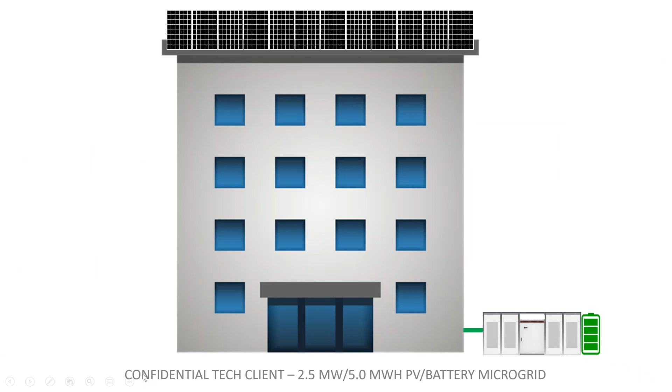More recently, I've been working with a tech client that's putting in a really large PV and battery microgrid, so they can both do demand charge shaving. They can look at how much carbon's on the grid and reduce their carbon emissions, and disconnect from the grid if the grid goes down.

The other really interesting thing, and this is where a lot of the presentation is focused, is we realized there's quite a bit of carbon involved in the materials in the building and in building buildings. This graph shows the yellow as the carbon to build the building. If you build a building in 2020, there's a certain amount of carbon in the materials and physically building it. Then once it's in use, the operation releases carbon. For the average building, it takes something like 12 or 13 years for the carbon from energy use to match the carbon embodied in the building just by building it. The first time I heard about this was actually with our building back in 2005.

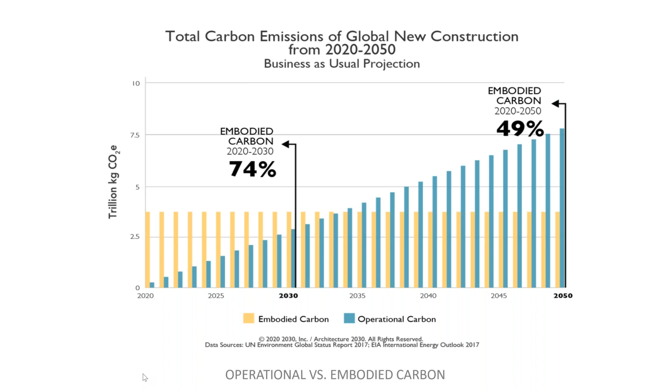The structural engineer, David Mar, was explaining that they're going to put fly ash in the concrete, which reduced the amount of cement and saved carbon because of something called pozzolans in the concrete.

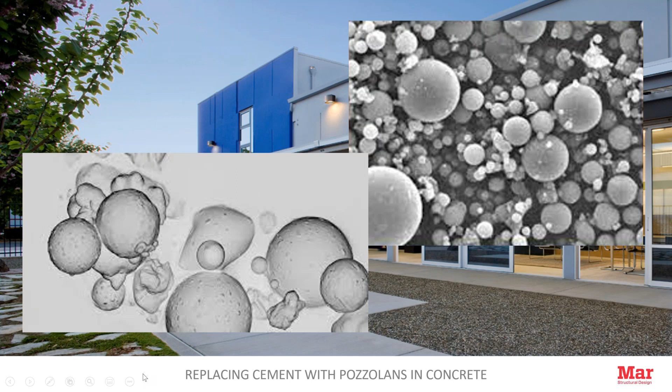In 2008, an architect named Larry Strain did this in-depth study. I had never seen anything like this before, where he was looking at the carbon in all the materials in the building, and even the carbon from workers driving to the site and things like that.

For this particular project, it was mostly wood construction, so a lot of the concrete ended up being in the slabs, the floor slabs of the buildings.

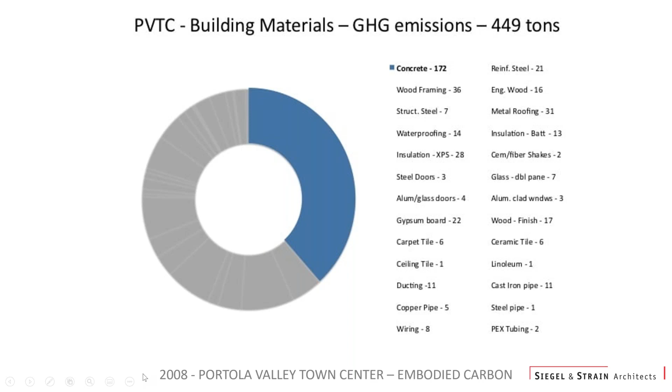So if it's concrete, you could look at things like fly ash or reducing the amount of cement in the concrete. If you're using steel, recycling is a key way to reduce carbon. And then, of course, if you could use renewable materials.

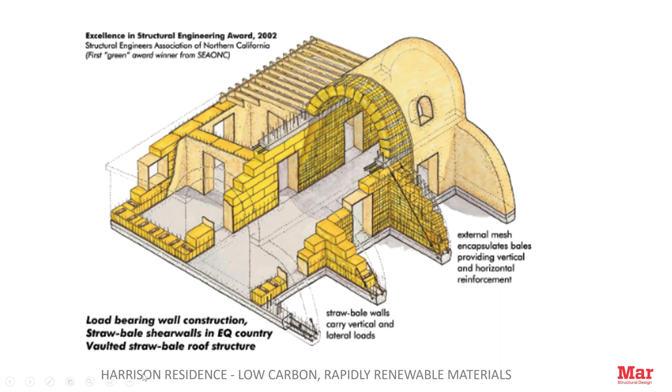This is the same structural engineer, David Mar, who did this crazy straw bale building that even had straw bale as part of the structure.

Most recently, we're just opening a project in Silicon Valley that is, my understanding, the largest mass timber project in the country right now. So using wood as the structure can reduce the carbon in buildings.

Hi everyone, my name is Webley and I am a project manager at New Buildings Institute. I am an architect with 18 years of experience in the sustainable design and construction industry. At NBI, I focus on promoting net zero building research through codes and policy development and market outreach. Recently, I've been conducting research on incorporating embodied carbon into the building code. I'm going to walk you through some of that today, as soon as I figure out how to use the controls here. There we go.

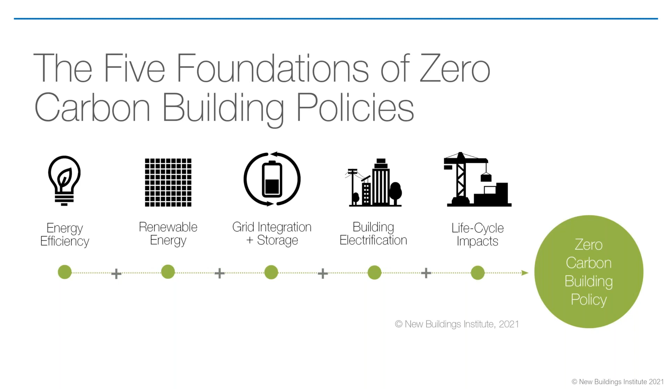Connie kind of introduced us a little bit to NBI, so I won't share too much except our 5 foundations. Together, these five foundations will help get us to a carbon neutral future. Each foundation has a really defined scope and a goal that will help us meet our 1.5 climate solutions. I'll be presenting focused on that last requirement, last but not least, the life cycle impacts component.

As David discussed, our building codes have become more efficient. We've reduced our operational carbon. We still have more to go, but we're getting there. And the embodied carbon emissions has become a larger piece of that whole carbon pie on a building. So more people in the design and construction and even the product manufacturing industry are seeing that embodied carbon really needs to be addressed.

And we've also seen this through third-party rating systems. They've been working on this for, I feel like, over 20 years at this point. They've been encouraging the evaluation of embodied carbon, of singular material, and whole building embodied carbon for decades. So because of the efforts made by these early adopters, we're able to have the conversations that we can today, that has been able to look at codes and policies.

Voluntary programs have been considering embodied carbon for years, as I mentioned. Half of the embodied carbon rating systems, if not more, address embodied carbon in some fashion, whether it's required or whether it's optional. So from LEED to Living Building Challenge, Green Globes, BREEAM, Green Star, and more.

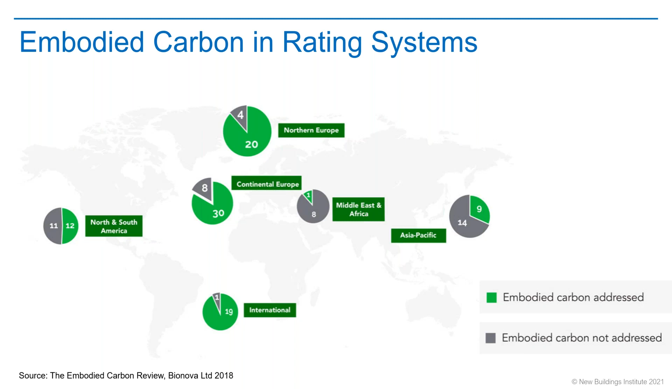And many architecture firms have been documenting their embodied carbon within their projects, whether their clients are asking for it or not. Perkins & Will is making news by voluntarily designing to net zero embodied carbon. HOK and many other design professionals have been signing on to industry commitments like the SE 2050, which is the US Structural Engineers 2050 goal, and AIA's 2030 challenge for committing to track, reduce, and report embodied carbon.

So those that are currently tracking and reporting embodied carbon are leading the way for future policy by providing us this really invaluable data.

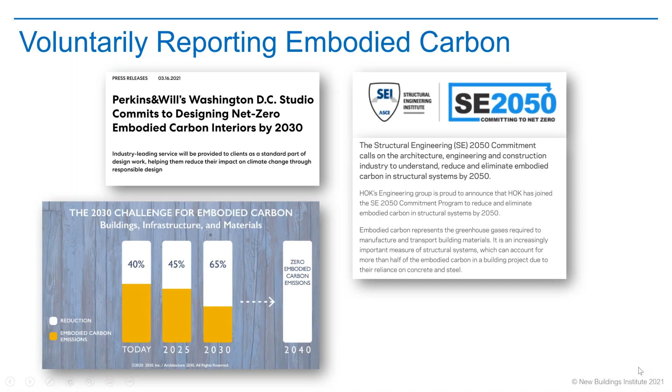So we're starting to see this traction in the market to address embodied carbon head on. Instead of kind of through voluntary actions, we are working with codes and policies to address it.

Buy Clean California is probably the most popular policy. It's been replicated in other places like Washington, Minnesota, Colorado, which was just passed, and other places. The Buy Clean model requires that jurisdictional dollars are spent on specific products like steel and insulation that meet specific low carbon requirements. There are other policies.

Portland, Oregon, where I am from, has a low carbon concrete incentive, which sets a global warming potential, or GWP, which is a term I'll be using pretty frequently. So global warming potential is a way to present carbon CO2e, so carbon dioxide equivalent.

Hawaii has a carbon dioxide mineralization concrete policy that requires that all state-funded projects that use concrete are required to include carbon capture. So that one's a little bit different.

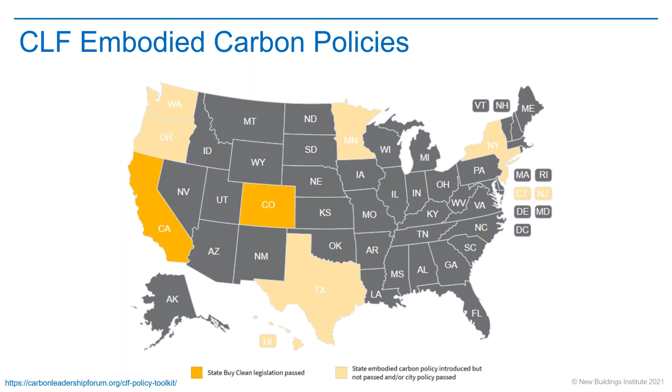As I mentioned with the Buy Clean, the public embodied carbon policies use the power of the government spending to direct their dollars towards material specifications that meet their climate goals. So it's very tailored towards a specific climate.

Where codes come in is that they really set a limit for all buildings. All buildings must comply, and it's a direct regulatory process. So this really sets rules that everyone, like no one can get out of it, essentially. We're no longer looking to just kind of nibble around the edges. We want to go full force and have all projects comply with embodied carbon requirements.

And we really believe that we need that deep change to address our 5 foundations that I mentioned. So we have established building policies. They've done a great job at addressing energy. We have more to go, but we have these policies in place.

We've got codes, we have zoning, building performance standards, jurisdictional building policies, etc. But these tools have not yet directly responded to carbon, and that's okay. We don't necessarily need new regulations. We can use our existing frameworks to address carbon, and that's what we are hoping to do.

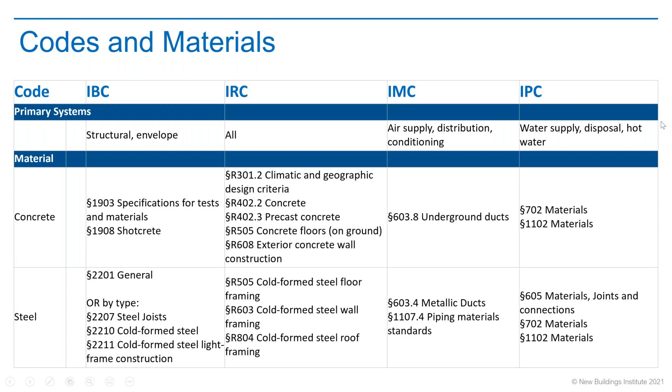So we're looking at three different opportunities to address upfront embodied carbon in codes. The first is EPD reporting—EPD meaning Environmental Product Declaration. We're suggesting that a specific percent of materials, by cost, weight, volume, or maybe even just a count, perhaps 50 materials within the project, provide EPDs. This helps prime the market for what's coming and allows us to collect important data that can inform future steps, like the materials approach.

With the materials approach, we want to set specific targets so that materials must meet specific embodied carbon requirements. We might focus on high global warming potential materials like concrete and metals at this point, or we could encourage low energy or low carbon manufacturing processes. We're already seeing this with programs like Energy Star and WaterSense.

The third component is reducing overall embodied carbon compared to a baseline, through a whole building LCA. We could look at a percent better than a specific baseline, or set a carbon limit per floor area. The limit could be based on different product phases—so upfront embodied carbon, or we could look at whole life carbon, which is everything from product manufacturing to end of life.

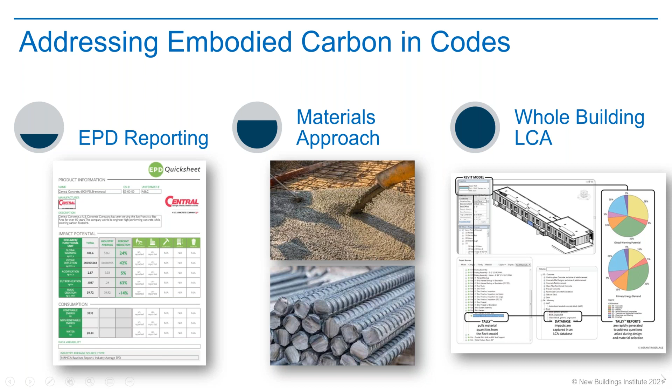When it comes to environmental product declaration reporting, it's important to know that this is just a bare minimum. EPDs are a summary of the material life cycle analysis. They quantify the impact of a product on the environment, and include information about the manufacturer, the product, the life cycle analysis, the methodology, material content, emissions, etc.

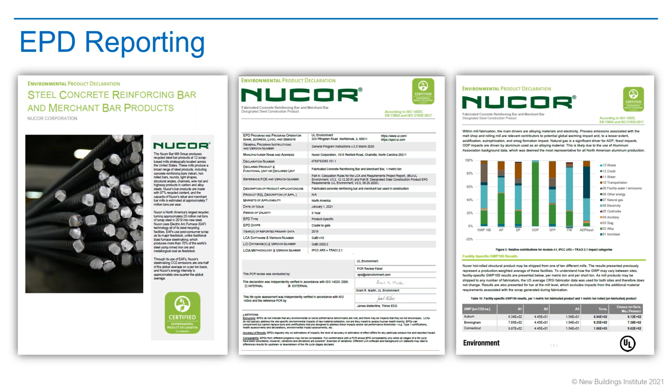But the EPD is really only data. The existence of an EPD does not mean that it meets a specific environmental standard. It might include or disclose information about a product, but it does not verify that it meets a certification like GreenGuard, for instance. It might include information like the specific recycled content.

The second approach is the materials approach. We're interested in setting specific low embodied carbon requirements for materials at this point, and we really need the data to do that. That's why we're encouraging the collection of EPDs—to have that data for materials, to be able to look at it and set national trends.

In this example, it's an analysis of thousands of concrete EPDs from different regions in the US. We evaluated the data to see if we could set concrete global warming potential limits based on different regions in the US, or if we had the data to set that nationwide. So in this case, we're looking at 4,000 PSI concrete, a specific strength of concrete, to see what percentile to set that global warming potential limit.

If we set that GWP too high, it won't do too much to reduce embodied carbon in concrete. But if we set it too low, manufacturers won't be able to comply, and then we're dealing with variability based on regional materials. So global warming potential might not be the right data point for every product.

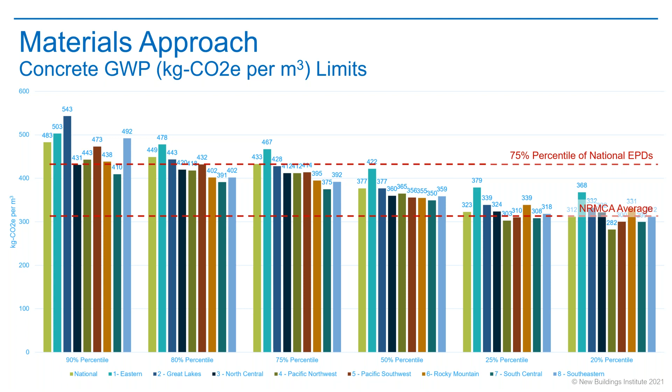As I mentioned, we're also looking to include specific material manufacturing processes that reduce embodied carbon in manufacturing. For instance, Energy Star certifies cement, concrete, steel, and even cracker plants by evaluating their metrics. That might be an appropriate way to look at code, similar to what we do with WaterSense and Energy Star for appliances.

The third option is to look at whole building lifecycle analysis—whole building LCA, as I'll use that term frequently. When we look at energy modeling, we're past looking at the energy savings of a potential window—we're looking at the energy efficiency of an envelope or the entire building, and we have baselines for that within energy modeling. We can do the same thing when it comes to whole building embodied carbon.

We can simply require that an LCA be done on a building, or we could set specific limits per building system or for the full building. As I mentioned with the Vancouver, BC rezoning requirement, this is similar—they're currently just requiring that an LCA be done, and we assume that in the future they'll set requirements for what that baseline must meet.

The LCA offers a way to look at embodied carbon for a whole building. We'll see some examples of this in the future. But one of the largest benefits of the whole building LCA is the consideration of building reuse.

Where the first two options I looked at really look at new materials, the whole building LCA encourages reuse and has some historic and equity considerations, but there's also some negativity associated with that, which we won't get into today. When it comes to reusing buildings, we're always concerned about asbestos and lead and other hazardous materials in those buildings.

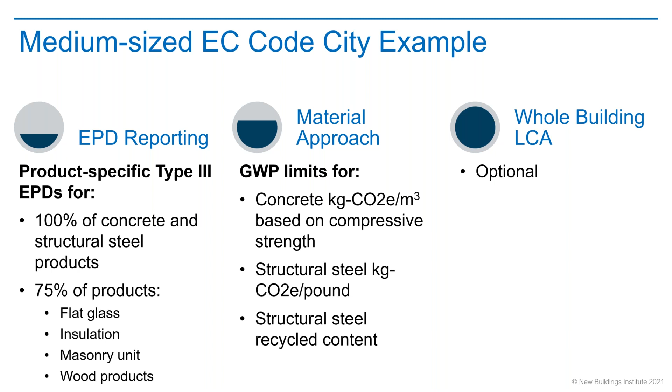I should also mention that as I present this information on concrete, that this isn't the first time that concrete has been regulated in code. Marin County in the Bay Area was actually the first to set concrete global warming potential limits. Our intent with this approach was to provide different options. In Marin County, it is really based on global warming potential of concrete and cement. And here we're looking at a couple of other options.

So we know that there's over 100 Energy Star cement and concrete facilities that are reducing their plants' energy consumption. If we can encourage the use of those certified facilities, that could be a good compliance path. And since EPDs don't account for offsite renewable energy, we're evaluating if a product manufacturer could require renewable energy certificates to show that they are using a lower energy source.

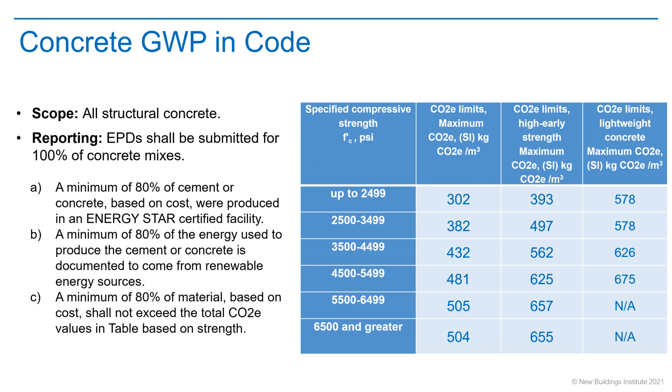So just want to still reiterate that we are exploring these options. I absolutely welcome input, feel free to email me. We're currently questioning if the recycled content will make the progress necessary to move the market, because it seems like the market is already there, but it also has a benefit of prioritizing US made steel. So that's a benefit in the US in some capacity.

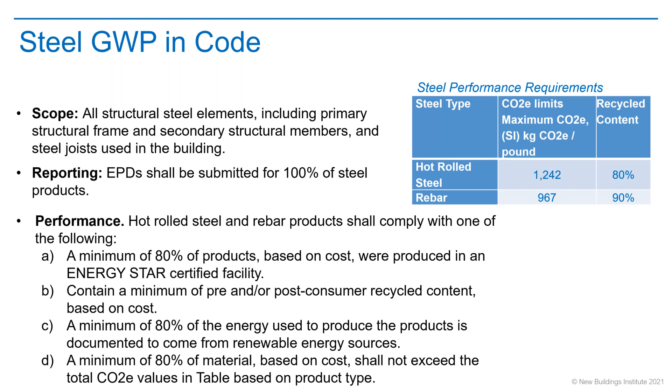And we know that EPDs are a great industry standard, but they really aren't perfect. So how can we work with that standard, but also look at other options where the EPD is not addressing some of the environmental aspects that we'd want to see for reducing embodied carbon. And ideally, all large projects would actually conduct a whole building LCA, and we'd have consistent terminologies and baselines that would be used around the globe, but we're really not there yet. We're working with others, and we see how a low embodied carbon future is possible, but it's going to take all of us working together on it.

So as I mentioned, we're still exploring these options. I welcome your comments, feel free to email me or ask questions at the end of this. Thanks.

Thank you. This is Roland Hunziker. I greet you from Geneva, Switzerland. I'm with the World Business Council for Sustainable Development, Director for Built Environment.

Webly, you could not have given a better handover than your last words in terms of whole life carbon assessment, and that's exactly what Chris Carroll from Arup and I will focus on in the next 15 minutes. WBCSD is a global member-led business organization with about 200 global companies from 23 different sectors, global coverage, and my focus is particularly on the decarbonization of the built environment.

I think we all know these numbers, but it's still important to put them in front of ourselves. The built environment makes up 40% of global energy-related emissions, and I think it's a number that is still not sufficiently digested by all stakeholders. This is a massive sector and needs a really coordinated and collective response, as Webly has mentioned. And we see the importance of embodied carbon obviously going up.

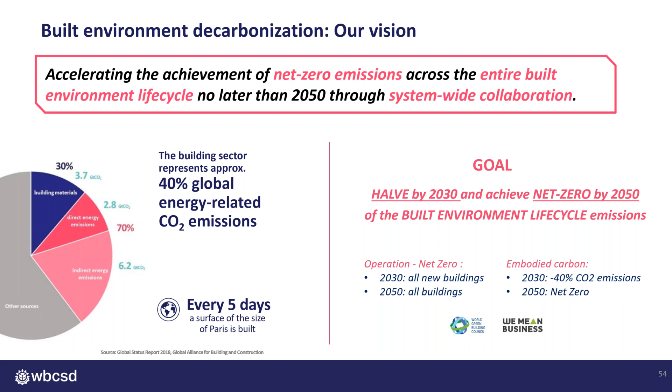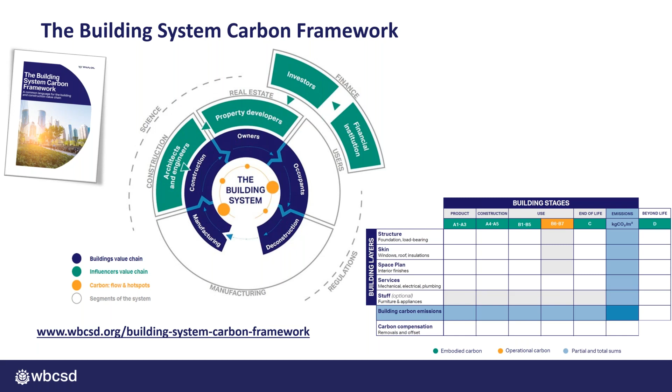So what this framework helps us do is involve all actors with influence, address all the emissions across the whole life cycle from embodied, and also including energy, and including the embodied carbon during refurbishment, which again I think Chris will highlight plays a significant role along the life cycle, really helping us take on a performance-based approach that reduces these life cycle emissions.

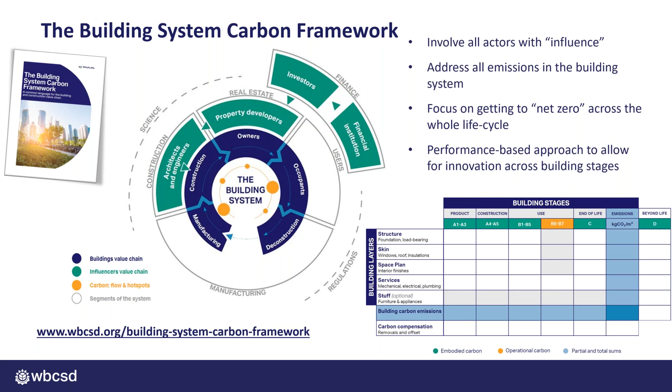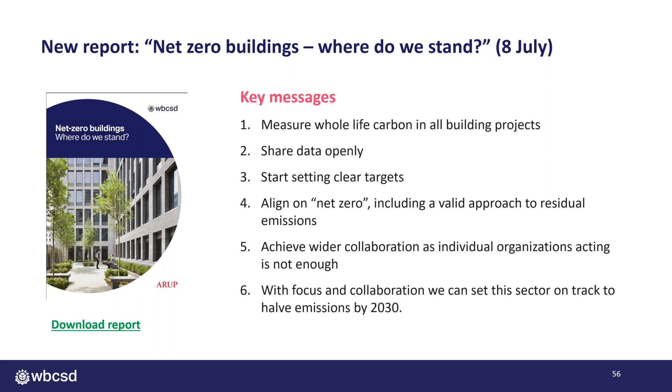This is what we published two weeks ago, and this is what will be covered in much more detail in Chris's presentation. It's about the importance of getting the data, showing the data openly, and setting clear targets. These are some of our main messages from this work, and we're also daring a challenge: we believe that with focus and collaboration, building projects today could probably already halve that upfront emissions footprint, or at the latest by 2030.

We issued another study that is quite related, but focuses on the investor and developer community - how those organizations that invest or develop projects can set requirements along different stages of a project lifecycle. It's a practical report. We've been supported on this by One-Click LCA based on their very large database, and also by leading examples from the Nordic countries in Europe that are starting to set embodied carbon benchmarks.

This study looks at how investors, developers, but also tenants can set requirements in the earliest stages of their projects. We believe that with this, we can help send an additional signal to all stakeholders in the value chain and really work together to achieve those performances that are set from the outset.

Just a look ahead - we're gearing up slowly but surely to COP26, and we'll be part of a group of global organizations helping to develop a built environment day. We really want to highlight the importance of one voice and one ambition that we are able to reduce emissions, and how the different organizations part of the race to zero can really make a difference by reporting, measuring, setting targets, and pursuing the radical collaboration needed across the full value chain.

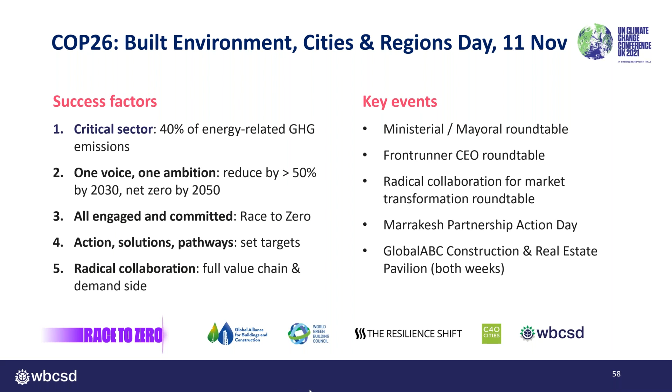So with that, I just wanted to introduce the context of the work we are doing, and now I'm handing over to Chris, who will walk us through the case studies in more detail.

Given the existential climate crisis we face, Arup have recently made a global commitment to put genuine sustainability at the heart of everything we do, and hence the statement, sustainable development is everything. I'm a director of Arup's building engineering group in London and Arup's UK net zero buildings leader.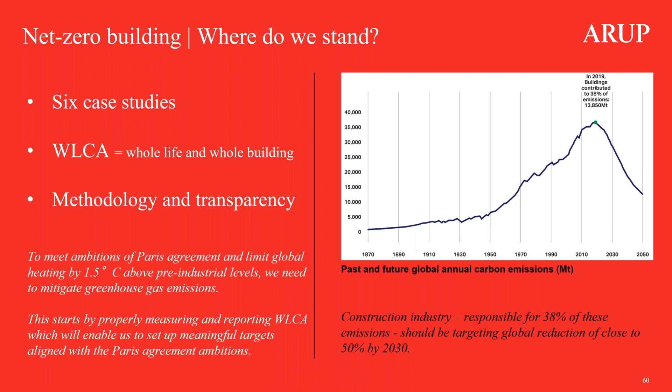A key asset we bring to our relationship and membership of the WBCSD is our projects and the projects that we deliver, and hence we committed to the idea in our first year of producing some in-depth whole life carbon footprint case studies based around our projects. We thought this would be relatively straightforward as a kind of introduction to the WBCSD, and we thought 6 consistent whole life carbon assessment projects would be a relatively straightforward thing to do, but it proved a lot more challenging than we expected. I think this already tells us something important, and we'll come on to more on that later.

I'll go into a little detail in a minute, but we ask that you please download the report and go through it yourselves. There's a lot of data, a lot of information in the report, and we won't be able to cover it in any way here in this session, but please read it at your leisure.

There's actually very little published information on whole life carbon assessment, maybe with this clarity at present. One of the things we're pointing out is this needs to change rapidly. So we think this report is important because it's based on real, transparent data that's presented in a way where you can see exactly where the carbon sits across the whole life cycle of a project.

As Roland put on the screen earlier, we believe it draws out some very clear key messages - messages that reiterate what Webley was saying earlier, that we have to move rapidly to whole life carbon assessment of everything, all our projects at all stages. We have to develop and share carbon intensity data openly, so the EPDs etc. that Webley was talking about. We have to develop and set clear global targets, and we have to much more precisely define what net zero buildings actually mean, and that you can't simply buy offset to claim net zero. These buildings that are claiming to be net zero have to genuinely be reducing global greenhouse emissions, and we have to achieve wider collaboration across the whole industry.

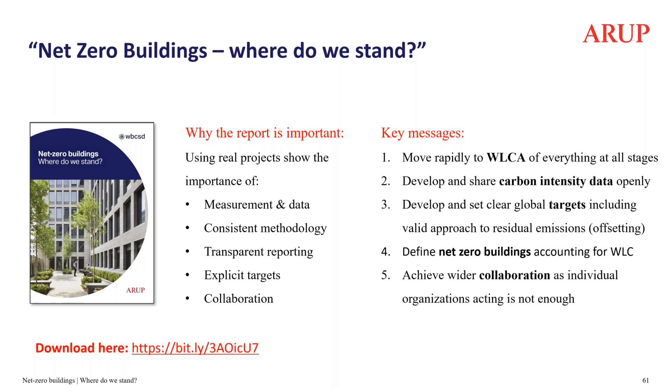This is the structure of the report. There's an introductory section, the 6 case studies are summarised, there's a results and discussion section where we talk across all of the results. We talk about the role of offsetting, we talk about some of the challenges, opportunities, and we draw out some conclusions. We hope that as you read the report, you would sympathise with the conclusions and draw similar conclusions yourself. Then as an appendix, we go into more detail in terms of the case studies and really put all the kind of assumptions and data that we've used, so that can be used by others to maybe even compare and contrast projects that you have sight of.

Methodology does matter, and we wanted to be consistent across our 6 case studies, but we think also the industry as a whole needs to be consistent in how it presents and shares data in relation to the carbon footprint of the projects that we develop. With our work, we also wanted to support trialling the WBCSD framework for reporting whole life carbon assessment, and we wanted to be part of developing a more common and clear methodology, promoting more sharing and development of good benchmarks and targets, and with all of that you can start to establish really good targets.

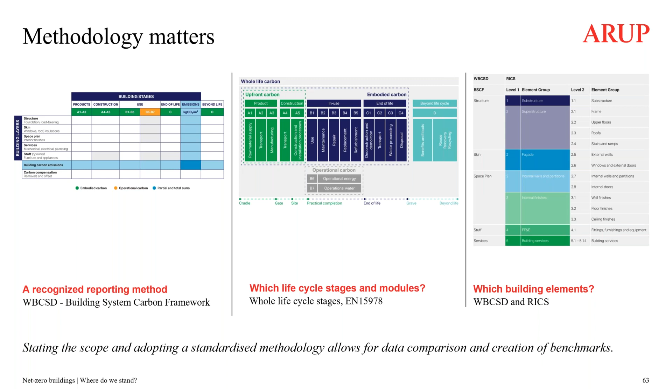In a similar vein, the assumptions that are made are also important, and it's important that we share this information transparently. The data available at the moment, both in terms of embodied carbon intensity factors and operational grid intensity decarbonisation, is very patchy and quite limited, and we can't keep this as a barrier to reporting whole life carbon on our projects. So in parallel with pushing for better data, we have to share and make best assumptions now until we fill the gaps. And that's what we've done here. You'll see through these case studies that in some cases where we haven't precisely known data, we've used benchmarks, or our best understanding as it stands.

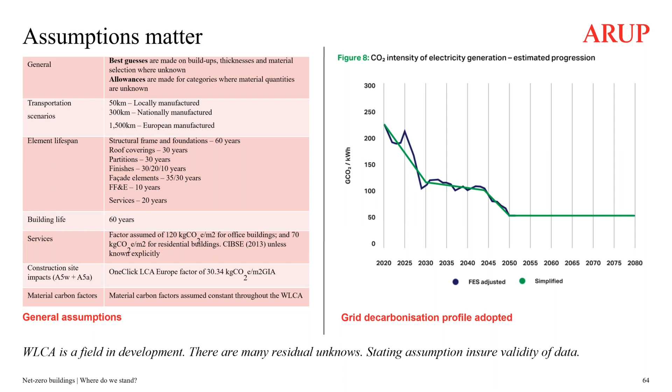We've also taken a look within the report at benchmarks and where targets might sit in relation to those benchmarks. There's a necessity to establish where we are currently, and then if we're going to reduce 50%, what we're reducing 50% from. Here in the UK, there's been a reasonable amount of work around establishing benchmarks, both in terms of embodied carbon and setting targets against that, and also in terms of energy use intensity and setting targets against that.

As Roland said, the key premise to all of this is setting up the framework for us to reduce everything, ideally, by half now, so to focus on really deep systematic reductions.

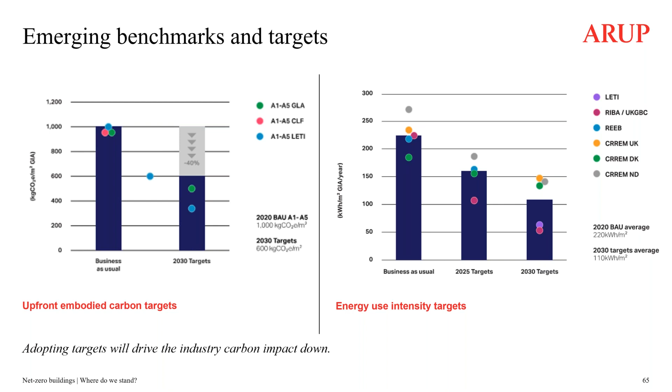Hold on a second, I'm just going to stop somebody hoovering. Sorry, next slide, please.

So the case studies, we recognise, are only 6, so they're limited, and they're all Northern European projects. But that wasn't through a lack of trying to get US, East Asian projects, or projects from other parts of the world. It's just that we couldn't get the data from these places. These places seem to be less advanced maybe than some of the countries in Europe in terms of whole life carbon assessment. Hopefully a situation that's going to change rapidly.

For instance, in London now, it's just become mandatory, pointing to what Webley was talking about. It's become mandatory over the last year in London to report WLCA, whole life carbon assessment, as part of the planning process. So you have to submit it with all new projects.

However, within the projects, we'd hope you'd recognise them as typical projects that you're working on, where the componentry and the types of systems are very similar to the stuff you're working on. But we would make it clear that all the projects had some kind of focus on sustainability.

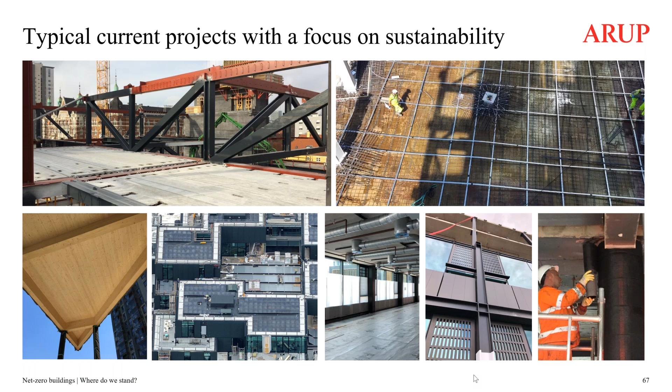Next project, next slide, sorry. Sorry, Connie, thanks. So this is one of... sorry, can you go back? Yeah, this is one of the case studies

So there's a description of each of the 6. Next slide.

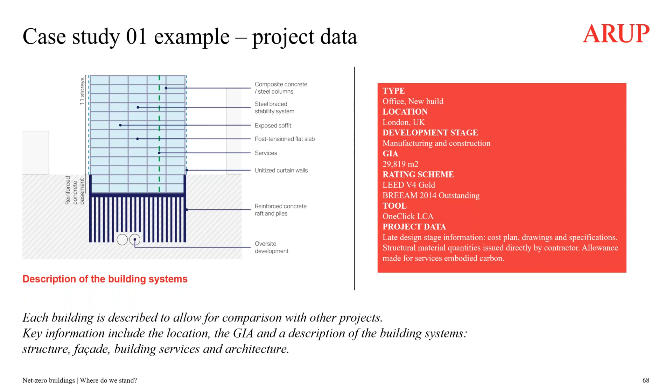We are clear in our description, the information we provide, what the assumptions are, and what data we've used in building up these whole life carbon assessments, in terms of the carbon intensity of the concrete used, type of concrete, how much cement replacement, type of facade or finishes, raised floors, heating systems, etc. Also the energy use intensity, and we've pointed to what we know about the grid intensities and decarbonisation of the energy systems in the various geographies we've looked at.

We've used One Click software to pull the data together, primarily because it's one of the only few certified LCA calculators we can use in the UK as part of the projects we have to submit from a mandatory perspective. Next slide.

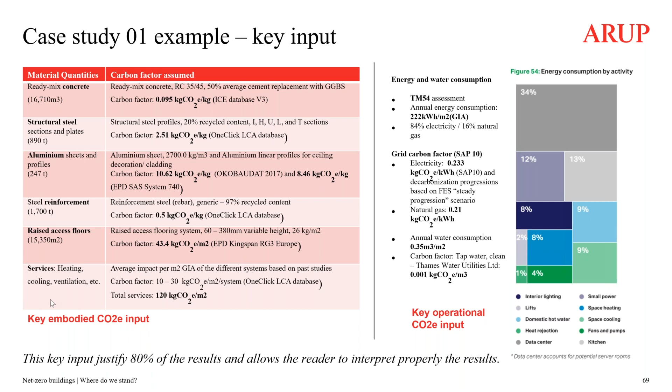So I realise there's a lot of data here, and I'm not expecting people to read it all. I'd urge you to go back and have a look at the report in more detail at your leisure.

This is the example presented in the WBCSD framework format, and the importance here is filling in all of the boxes in this framework, having the whole picture, not just a partial picture, and then seeing how that picture builds up in the various life cycle stages, from the 545 kilos of carbon per square meter up front at the end of construction, through the embodied carbon that's built up through the maintenance and refurbishment cycles during the lifetime, which adds about another 60% embodied carbon, and then comparing and contrasting that in the context of the whole life cycle and the operational carbon.

And this is actually a project. This particular project had a very heavy focus on embodied carbon, especially upfront embodied carbon, but maybe not quite such a focus on the operational side.

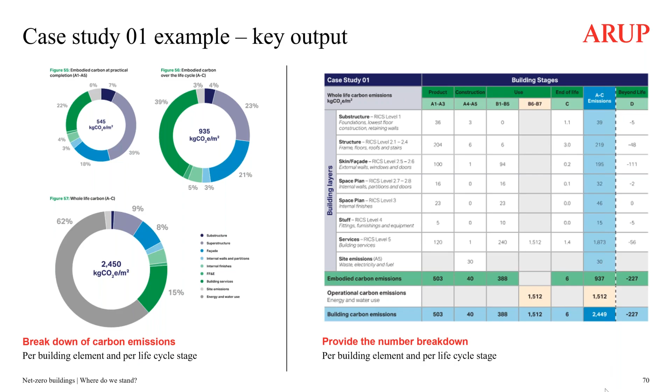And then we go into the results and discussion, breaking that down into 4 main sections.

Here we start to compare and contrast some of the projects. The number on the left-hand side here is the average across the 6 projects, and obviously the projects vary in terms of their typology, but this number seems to be a reasonable kind of datum across them all, in terms of something that is definitely achievable in the context of these particular projects.

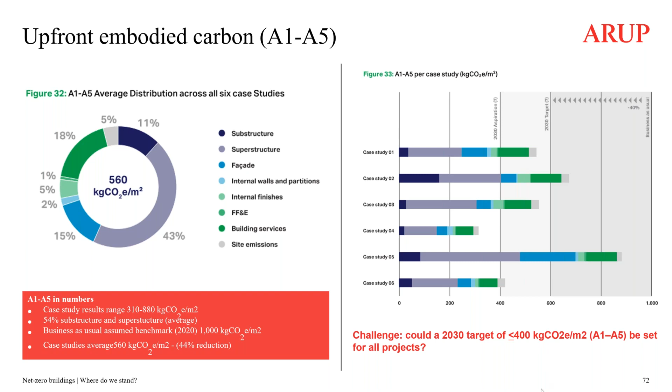And you start to see again the average gets built up as you look at the different life cycles.

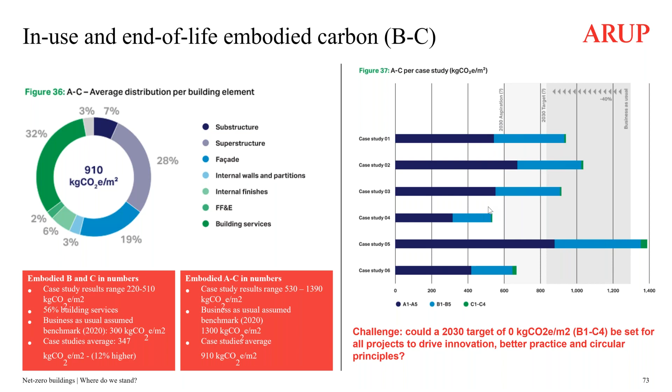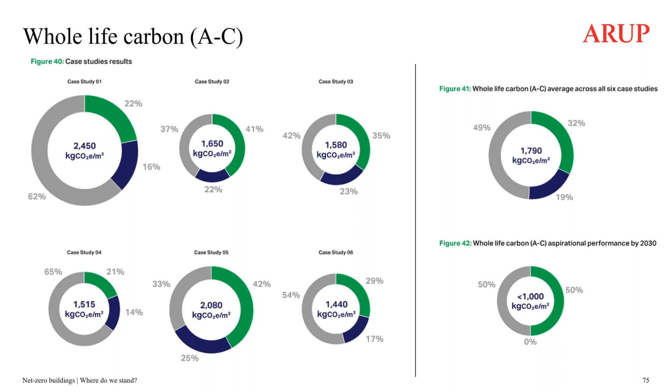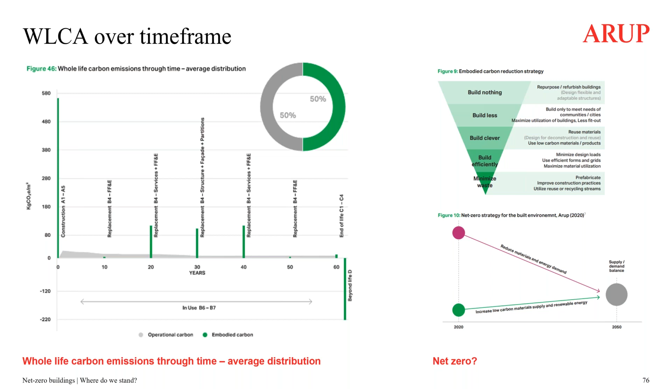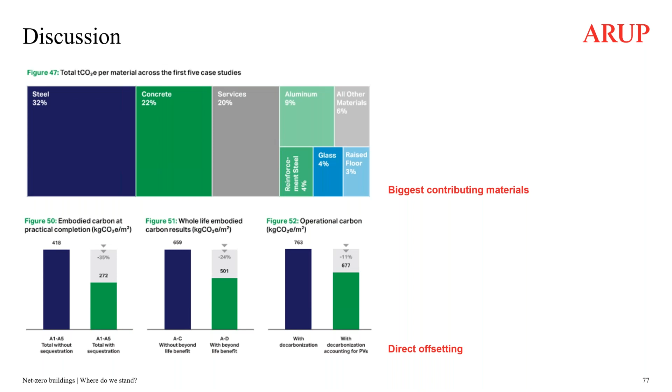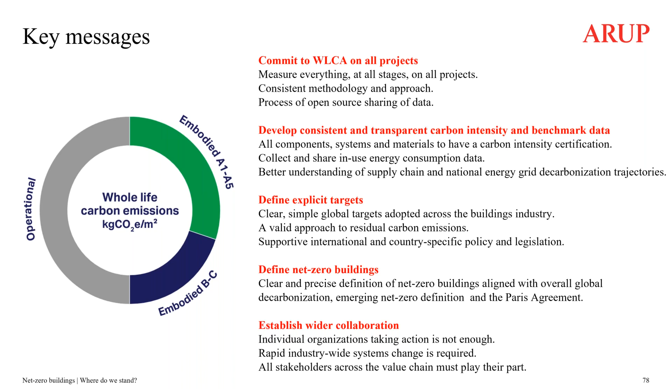I realise I've overrun a little bit, apologies. There was quite a lot to get through, and somebody started hoovering in the office partway through.

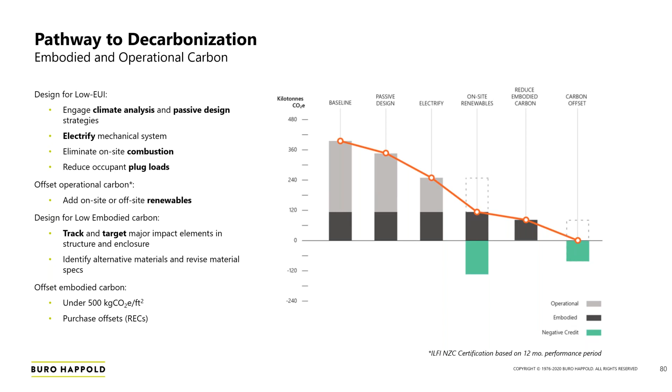So the first example I want to share is at a system scale. This is looking at the consideration of a battery storage system on a relatively large project.

In order to investigate battery storage, we have to consider carbon intensity, but on an annual and hourly basis. So rather than a coarse comparison from a yearly scale, to understand the influence of a battery, we need to look at daily behavior of charging and discharging that battery.

To do that, we looked at using carbon intensity profiles from this provider called WattTime. This is particularly relevant in the US context, but WattTime provides these normalized annual profiles for carbon intensity for your local grid systems. And this, we'll go to the next slide.

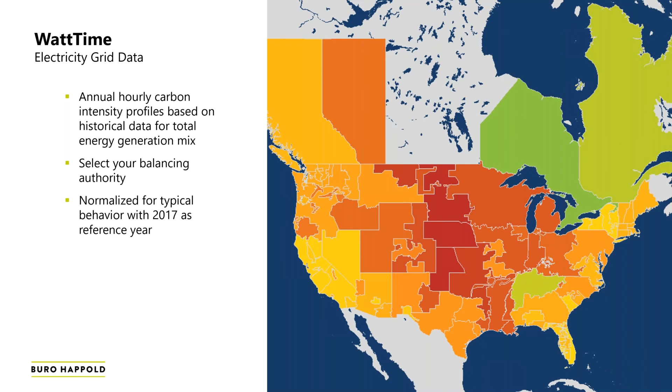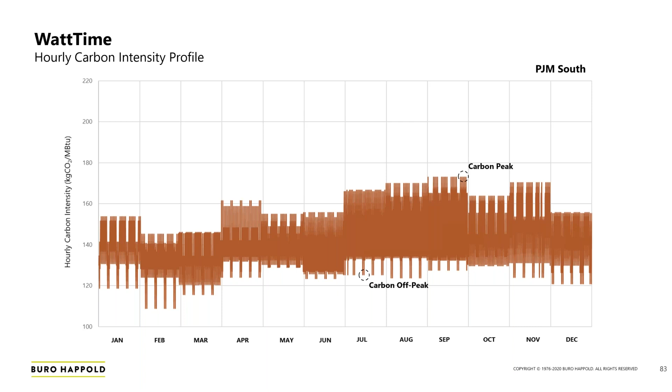Looking at a typical day, you can dissect exactly what the constants are looking like, early in the morning, late in the afternoon, and begin to understand when it would be beneficial to a wider carbon picture if you were to charge or discharge a battery system at different times of day.

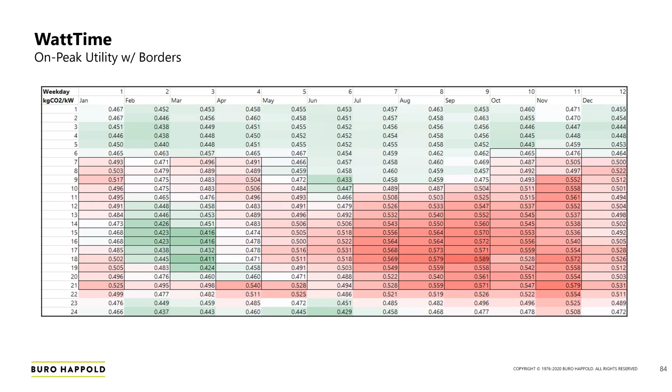For this study, we really designed two possible pathways. First of all, our baseline is not having a battery system. The second option would be having a battery system, but charging it based on when it's best for your cost - that has to do with the demand structure of the local grid. And then the third option would be optimizing based on carbon.

We're seeing a slight benefit on an annual basis if you're charging for carbon, when the grid is lowest in terms of carbon, and a slight penalty if you're charging when it's best for cost. That's actually interesting to observe, but I think overall these impacts are quite small. Part of the reason for that is because there's also an energy penalty when you charge and discharge a battery due to a loss based on its efficiency.

The other layer we wanted to consider in this study is the embodied carbon of this battery storage system. This wasn't a whole building life cycle assessment, but a zoomed-in approach for what's the likely footprint of this battery system we're considering. We used generally available research to estimate what this battery chemistry is likely to be, and what the research says is the footprint associated with that system. You can see here we've estimated the tons of CO2 equivalent associated with this 8 megawatt-hour system.

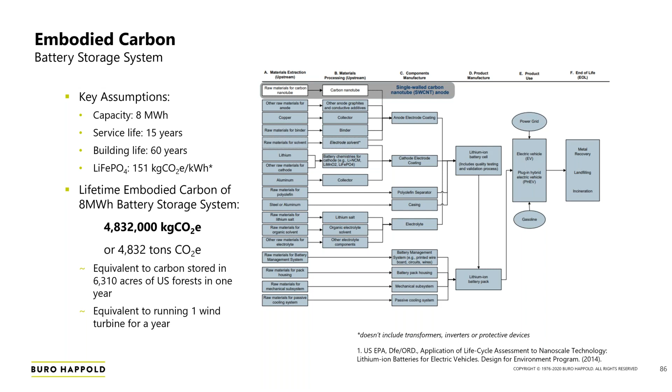Here you're going to see we're overlaying the operational and the embodied impacts. It's interesting to observe that because of the intensity of the embodied carbon portion of the impact, this battery may be important to the project for many reasons, but it's not likely to be a carbon savings over the lifetime of the building based on this analysis. That of course has to do with battery efficiency as well as the replacement rate, since we assumed this battery has to get replaced at regular intervals. So regardless of how you charge it, you're really not able to overcome the operational and embodied carbon embedded in this system.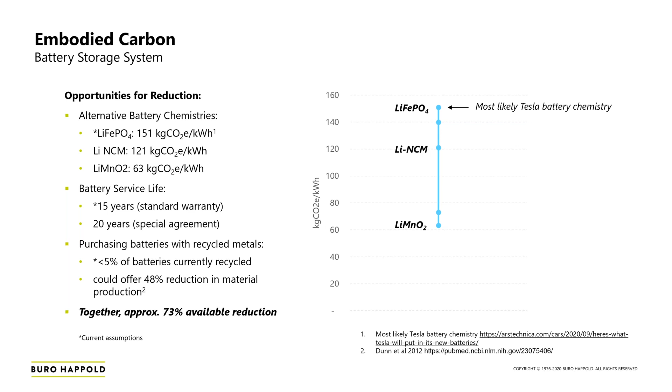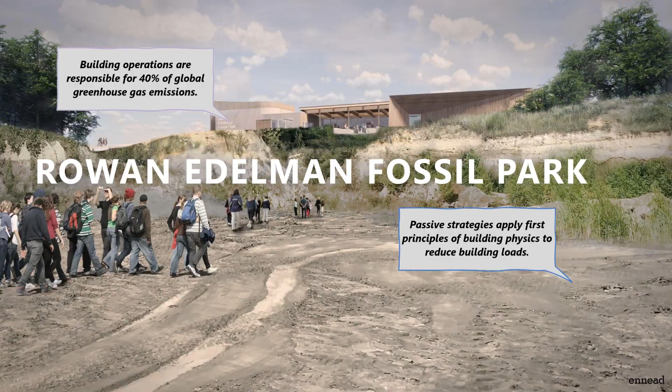The last example I want to share is at the whole building scale, again linking the operational and embodied picture for this project as a whole. This is the Fossil Park project, an exciting children's museum in New Jersey seeking Living Building Energy petal certification. I'll treat this briefly since we're limited on time. Our high-level strategy is to integrate our passive approach with our active strategies and renewables to get that whole building picture that many previous speakers have spoken to.

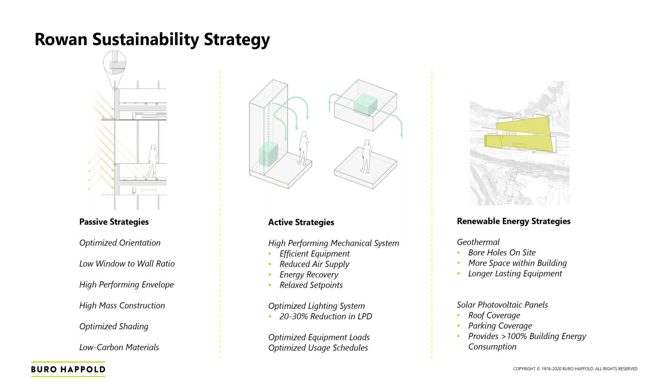In terms of passive design, we're starting to estimate the savings from a baseline case associated with higher performing facade systems. We're able to estimate that if you pick a higher performing facade, you're likely to achieve a certain amount of reduction in your whole building annual energy consumption. We use this to make recommendations to our clients about the benefits of choosing these higher performing systems.

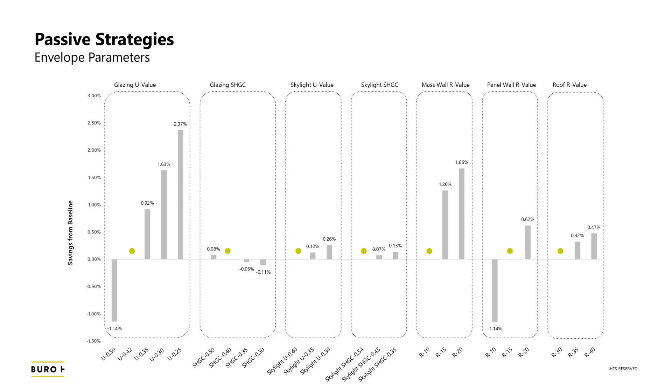We then escalate this analysis to the active systems as well. Very early on, this was a schematic comparison looking at baseline traditional systems compared to fully electric options like air source heat pumps or ground source heat pumps, and we could really clearly make the case for this in energy terms.

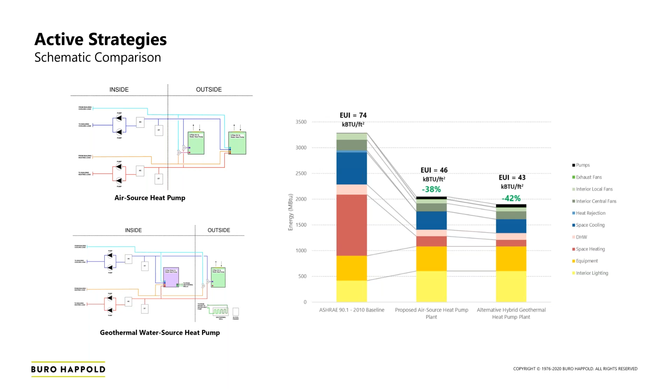Moving into design development, once we were able to make the case that electric was the pathway the building should achieve, particularly given interest in the Living Building Challenge, which doesn't permit combustion on site, we went about further developing the ground source heat pump comparison. This investigated four different ways of configuring the ground source heat pump systems. We're really in the details here, investigating how this is going to work and what kinds of energy benefits we might have for some of these better configurations.

While we didn't explicitly study embodied carbon, you can see that modules or options C and D noted on this slide are only 3 modules instead of 6. You could imagine that would come with an embodied carbon benefit as well.

Taking this energy analysis, what we're typically doing is converting to operational carbon for a study at this scale, just using a simple kilograms of CO2 per energy unit constant. That's a contrast from the battery storage study where we really needed that carbon data to be at an hourly resolution.

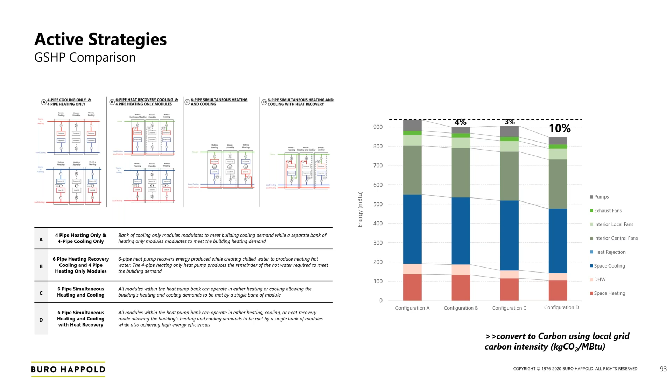A thing to consider about this building is it's largely a concrete structural system with a lot of exposed concrete in the interiors. And part of what that benefit is, next slide, is really about how that performs passively.

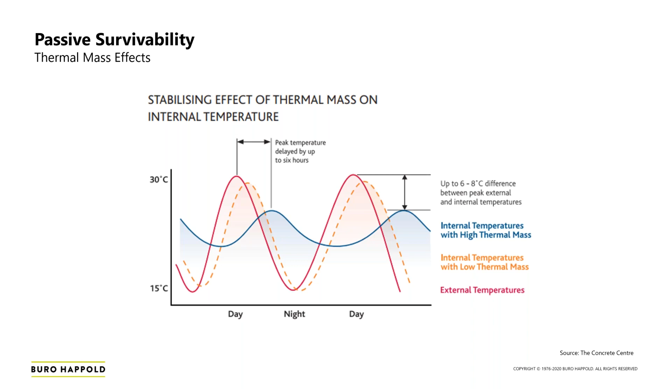When you have exposed concrete in your structure, you're able to actually use that concrete as a heat source and a heat sink. It basically stores and releases heat naturally because of its thermal capacity, and that results in a dampening behavior for the internal temperatures in that space.

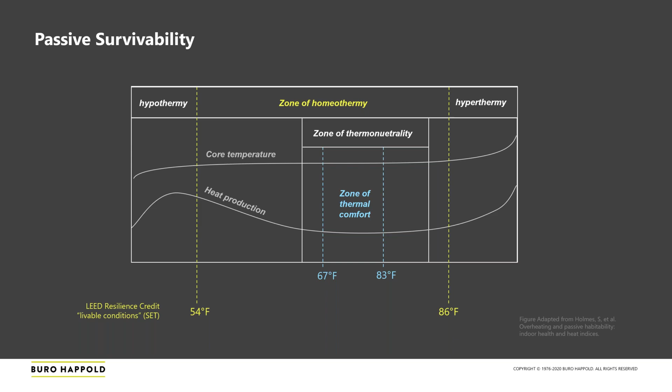We used this behavior to help demonstrate the passive survivability requirements for Living Building Challenge. This was important because you need to be able to show that in an emergency scenario, people could shelter in this building without experiencing hypothermia or hyperthermia. So this was kind of a temperature condition we needed to satisfy.

What that looked like is basically taking our energy model, turning off the mechanical systems and leaving on minimal internal gains, and seeing: are we satisfying these conditions in a 10-day free running mode?

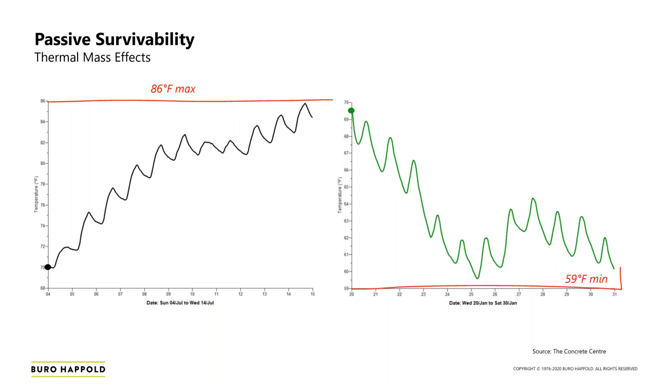So of course, while concrete is beneficial from a thermal mass perspective, it is really the driver for the embodied carbon picture. And that was the final piece of this analysis I'll share before closeout.

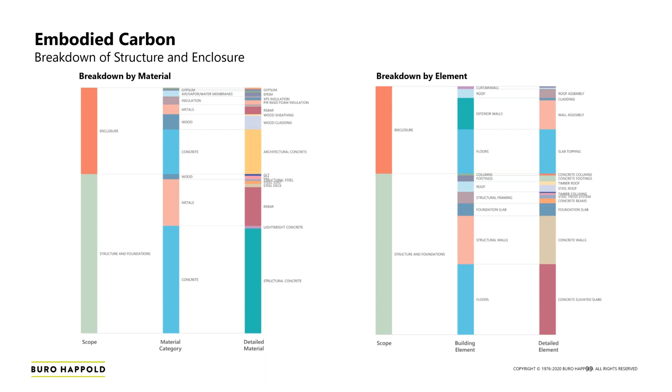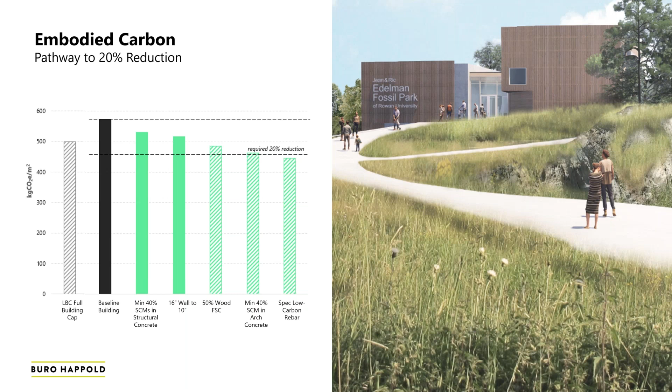In closing, I wanted to just share, this is more exploratory. I think it points back to Chris's and Roland's explanation before, but we want to start considering what this looks like from a whole carbon perspective on a project. And this is by no means comprehensive. There are, of course, phases missing and pieces of the building missing, including mechanical systems.

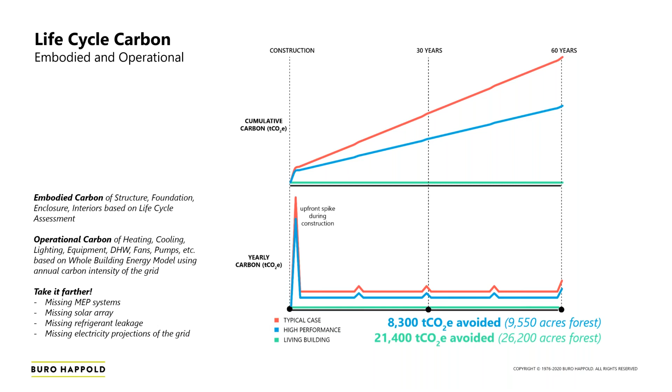And the last thing I'll say is this upfront spike during construction associated with embodied carbon is really critical. That's why it matters, and we need to consider it early in the design process. So thanks so much for having us, and I'll conclude there.